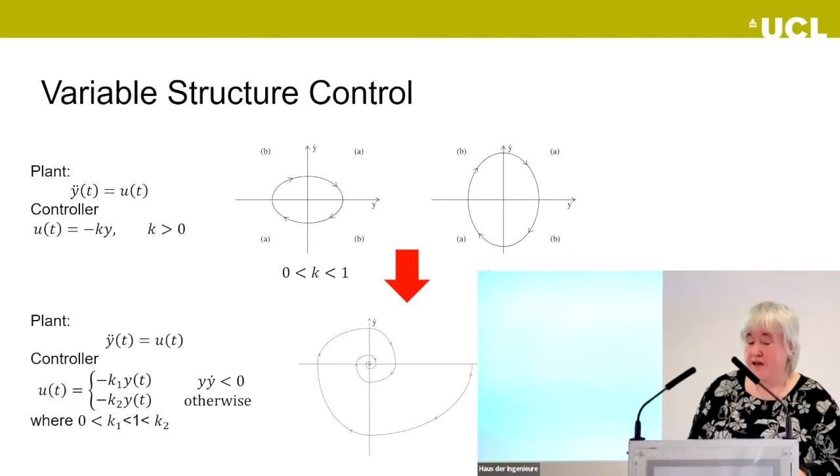However, if we take those two control laws, we have k in some quadrants that's less than 1, and k in subquadrants that's greater than 1, we can form a system which is asymptotically stable. So effectively, in those quadrants labeled B, we take my elongated fat ellipse and that trajectory, which moves us closer to the origin as we move around. The problem becomes if we stay on that trajectory, we then move further away from the origin, but not if we switch to the tall ellipse. If we switch to the tall ellipse at that point, then that continues to take us closer to the origin. So we get this very nice asymptotically stable behavior for the price of a switch.

So with variable structure control, what we have is a control law that we change according to some defined rules, which can, as we will see in some of the examples I talk about, be very, very different. And we have this nice potential to develop new properties which weren't inherent in any of the original subsystems, and they can appear.

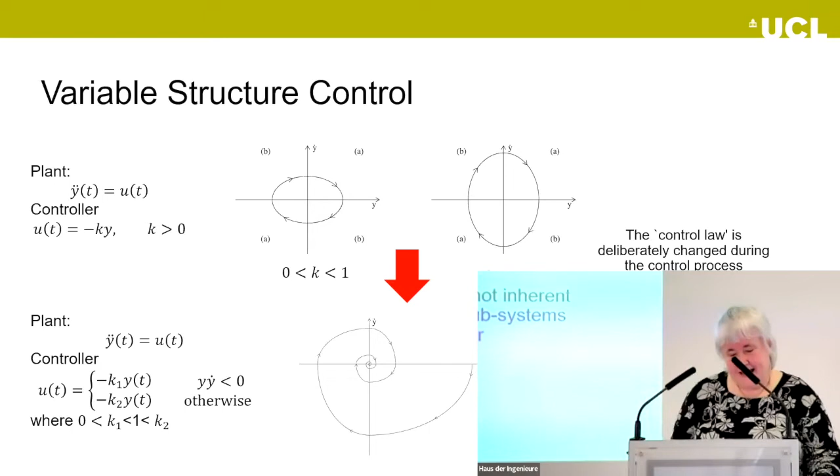But actually, variable structure control can give us a lot more than this. And I think this is the thing that has always excited me the most about variable structure control. When I talk to my students, I talk about the magic of discontinuous feedback control.

Let's think for a minute of the same double integrator we had before and consider that our nominal plant. Let's then say we have some sort of a perturbed plant, which in this case I'll take to be a scaled pendulum. So it's the nominal double integrator with some uncertainty that's written in red.

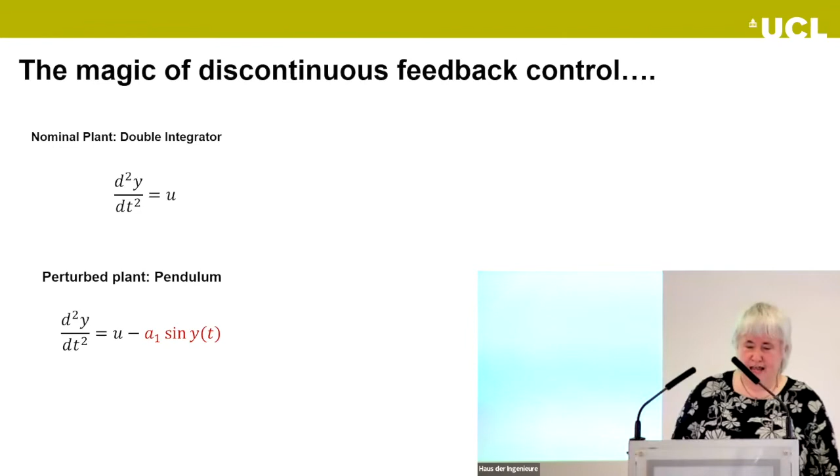If I design a very particular type of discontinuous feedback control, so I design a switching function, which we can think of very, very simply as the desired dynamics I want my system to have. So in this case, my switching function, when s equals 0, gives me a first order system with a pole at -1. I'm saying that that's the behavior I'd like my double integrator to have. Clearly, there is a very broad class of desirable behaviors I could pick, but this is what I've picked in this particular case. And I've chosen a controller which is just a switch.

If rho is sufficiently large in my switch, then both my nominal plant and my perturbed plant, their evolution can be seen on the phase portrait in the middle. And what we see is an initial transient that's different, and that's always going to be the case. So before I hit that line, which is effectively my line y dot plus y equals 0, I'm lying on my switching function. Before I hit that line, different things may happen to me.

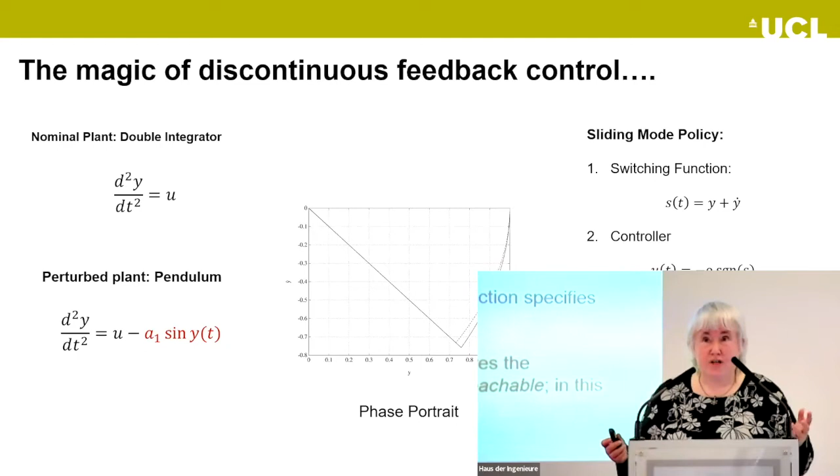So it's really important to understand why this happens, because this rather subtle difference between how we do control and what the control does is really what opens up the robustness. It gives us this whole potential to consider large-scale systems without knowing lots of information about them. It gives us lots of potential to find out what's happening with systems, for example, in terms of monitoring and failure detection. So what effectively happens when I apply that discontinuous controller?

Well, effectively what happens is I'm applying a signal which is switching around. In theory, it's switching with infinite frequency, which clearly, on the other hand, gives us other problems. But if we filter that signal, what we see effectively happens is that discontinuous signal, on average, is effectively reconstructing my sine term. So if we look at the filtered signal, which is the blue plot, we can see that it's pretty well following the uncertainty, the difference between that nominal model and the perturbed model.

So without knowing about it, this principle of the equivalent injection, this using discontinuity, gives us a means to find out a lot of additional information.

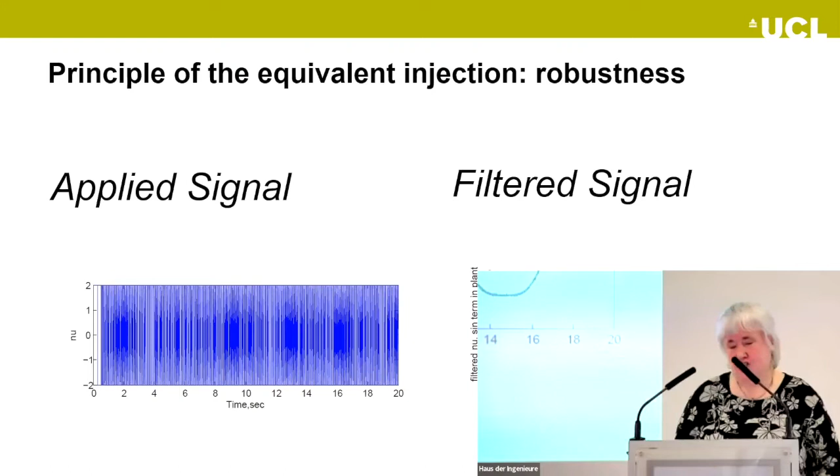One of the things that's interested me in very recent times has been this switch control paradigm and its relationship to nature. When I started my career, I was there with the power electronics people, I was there with the robotics people, I was there with engineering systems. But when we see this robustness, we think that, well, perhaps there must be more to it.

And a very good example of showing you how nature uses switch control is with something that's been incredibly topical in this coronavirus period, which is the immune system. Our immune system is a wonderful piece of engineering. For many of us, if we are subject to some kind of applied viral load, as we see on my figure, that's the kind of mountain, that's a virus load that's been applied to the system, then the immune system, a good healthy immune system, will respond to that viral load and bring us back to a healthy state.

And that plot on the right-hand side is actually experimental data. So it's showing the time evolution of the population dynamics of a specific type of cell following viral infection. And the first thing I think when we think about these control systems, because effectively it's a natural control system within the immune system, there is a feedback control. And I think it's interesting for us to learn from these ourselves.

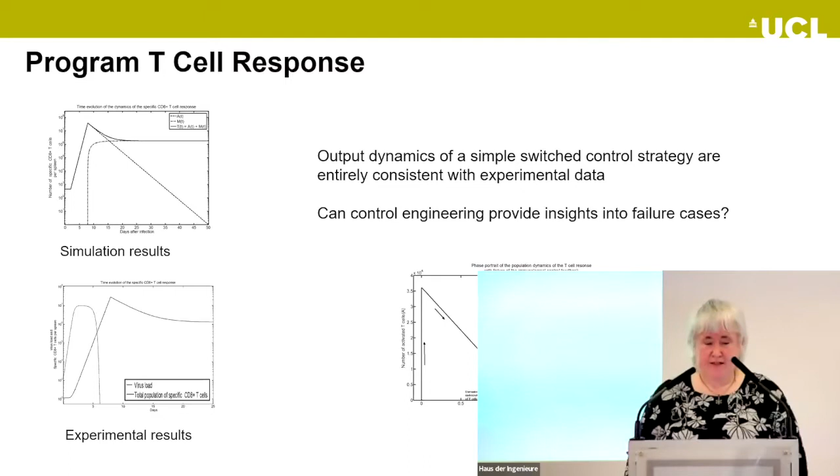And the answer is we can do things. I've worked in a number of areas with this kind of work. I'm just going to present one very briefly, which is one of the more recent ones, working with a clinician at UCL and a team of modelers in Australia, where we were trying to understand elite control of HIV.

Now, what's elite control? Clinically they refer to elite controllers. This relates to the quite small number of individuals who can contract HIV, but whose immune system suppresses it naturally. So they have a natural response within their immune system which suppresses the HIV loads to undetectable levels without treatment, whereas clearly the vast majority of individuals who contract HIV are going to have potentially a lifetime of antiretroviral therapy, for example.

So it's interesting to say, well, what really happens with these individuals who have this very special immune system that lets them control HIV themselves without antiretroviral therapy? Effectively what we need is a mathematical model, which we had - nothing whatsoever to do with me, that was from biological links to other teams.

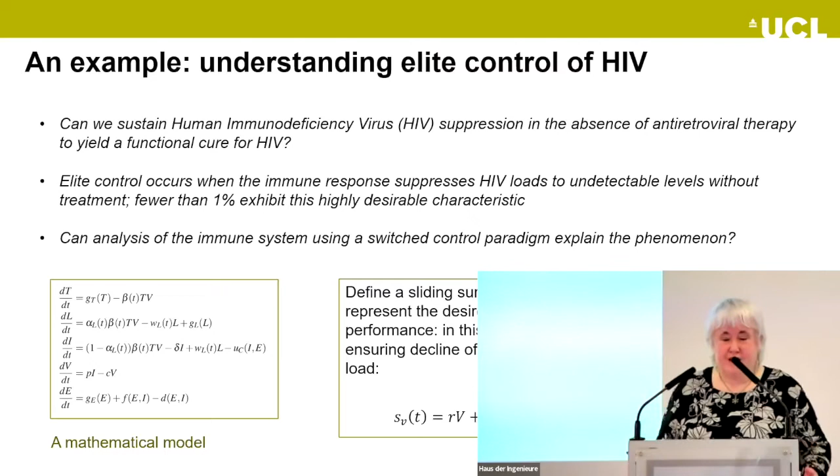So effectively, I've given one here. In this case, we just look at something very simple that says, first order, we want the viral loads to decay. And we use this notion of the sliding mode reachability condition together with consideration of parameter variations.

One thing you do find when you work with these models biologically is the range of parameter variations, whether it's a model for humans or for this, which was an experimental trial, an animal experimental trial - the parameter variations are quite vast. So they can be relatively coarsely defined, but certainly broad.

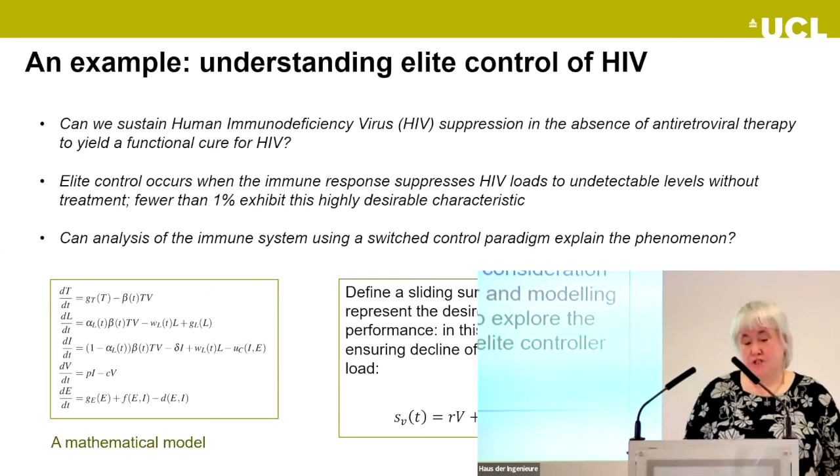So the problem for me and my collaborators was to explore effectively what these elite controllers were doing in this model of the elite control process. And we did a lot of testing via simulation and analysis, looking at the equivalent control, which lets us understand what is a highly nonlinear and time-varying control, and we can look at what the body is doing over time by this approach to understand how these immune systems are different.

And we've also used this kind of idea with certain drug treatments. Another example is psoriasis, which is a skin complaint, which can be very life-changing for those individuals that have it. There is a class of drug treatments for individuals who suffer with that complaint, which can be life-changing.

It can effectively eradicate the psoriasis symptoms - not like applying creams to minimize impacts, literally like my double integrator with the perturbation, it can eradicate the symptoms. But for other individuals, presenting with exactly the same history, exactly the same symptoms, given exactly the same drug treatment, the immune system doesn't respond well at all. So this is another example of how we can use these ideas to explore what's happening with either existing control systems that appear in the biology or a drug treatment, which is effectively, in my mind, an additional feedback loop.

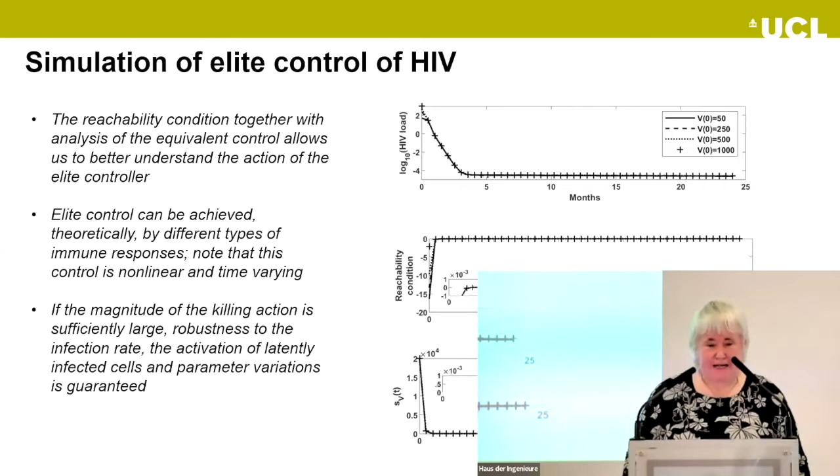I'm now going to move on to talk about some engineering work, and in this whole presentation, I'm not going to put together much mathematics at all, but I'll refer to one or two things because I know we may have some students listening for which mathematics was their thing. Certainly was always my thing - it's how I got into this in the first place, how we could use mathematics for good, how we could analyze problems and make a difference. Mathematics, and the mathematics underpinning control, particularly discontinuous control in my case, lets us do that.

So in this case, one of my big motivations has been scaling up. How can we manage complexity? When you look at energy problems these days, they might be involving consumers, they might be involving markets, they're still involving the core engineering there, but it's a much broader problem than it ever was.

There's definitely a need to consider communications, and as we'll see in this second part of my talk, I think data's good, but I was always kind of reticent when people thought the more data we have, the better we can do as control engineers, the better we can do as society. Personally, I think data needs to be managed. Some data can be good and very good, but some data can actually not be so necessary and give us problems.

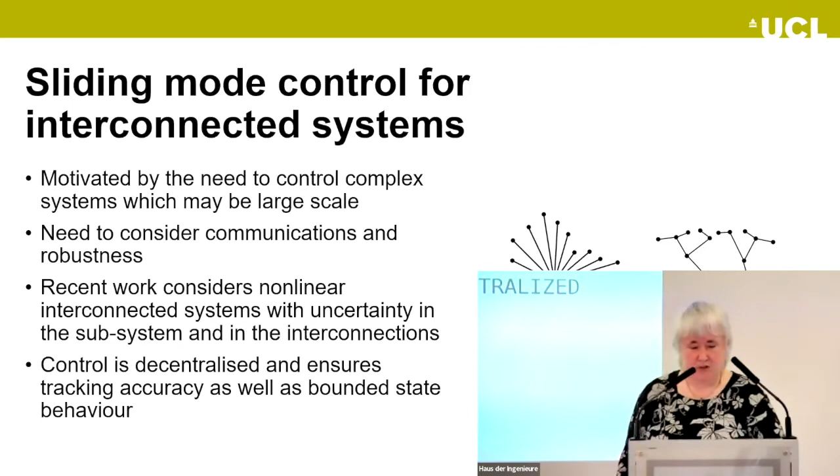So in this particular work that we did, we're looking at decentralized control. Very much pushed by my feelings that we don't want to know about everything - this isn't a good approach. But yes, a lot of the time we're interested in tracking something well, but also we're actually interested in the whole system too. We're not just interested in these outputs tracking well - we really want to make sure that the whole system is in a good space too. So we want bounded state behavior.

So here I've got a system description. I'm not going to talk much about the detail, but I'm going to highlight a couple of things. So we have an array of n subsystems, which are somehow interconnected. And as a control engineer, particularly as a discontinuous control engineer, I tend to think of my uncertainty in two broad lumps. So I think of uncertainty which is implicit in the input channel, which for me is never going to be a problem, because with an appropriate discontinuous control law, assuming I have sufficient gain, I can nullify that.

And then other lumps, which are not implicit in the input channel, and can be wider. In this particular case, they're representing unknown interconnection. So this is where I've got a system here which is nonlinear. It's got some uncertainty of its own, which I'm assuming is matched, so it's implicit in the input channel. And I'm saying, well, I can have a broader class of uncertainty, which is going to represent how these subsystems are impacted by the rest of the larger system.

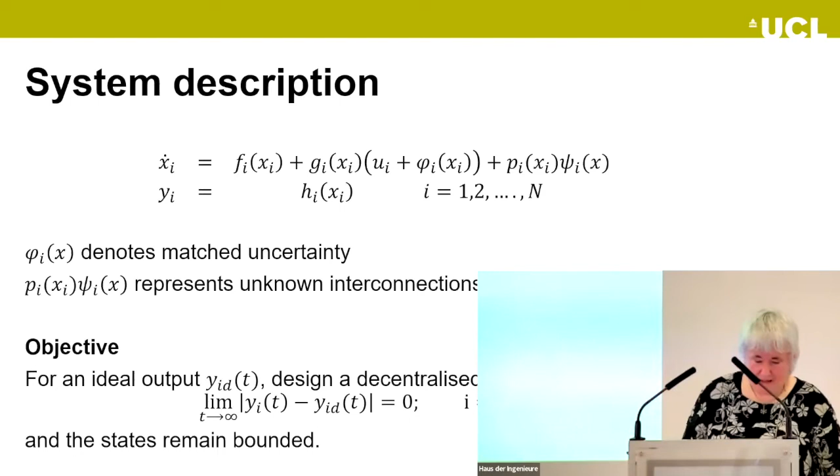And fundamentally, I'm wanting to take some sort of output and have a decentralized control, which will make the output of my system track this ideal output, and make sure that everything is bounded in this particular case. So I have to have some assumptions on this particular system, and as is frequently the case, I'm interested in channels - where the input acts, which is the first triple there. So GI, effectively where the input acts into my system. And then I've got the interconnections, which act through, if you like, a channel PI. So I effectively have two triples there that I'm interested in.

I'm always interested in how this channel where the control acts relates to the channel where the output is, and relates to the channel where my wider uncertainty comes in. I have some statements on uniform relative degree. I think probably the easiest way for some listening - I'm sure they won't want to go that far - but I didn't want to not put my assumption up and then get tricky questions afterwards.

The easiest way to unpick this is that if my uniform relative degree is equal to n, then I have a feedback linearizable system. So effectively here, this is looking at the distributions of those two function matrices, which represent where my input is and where my interactions are.

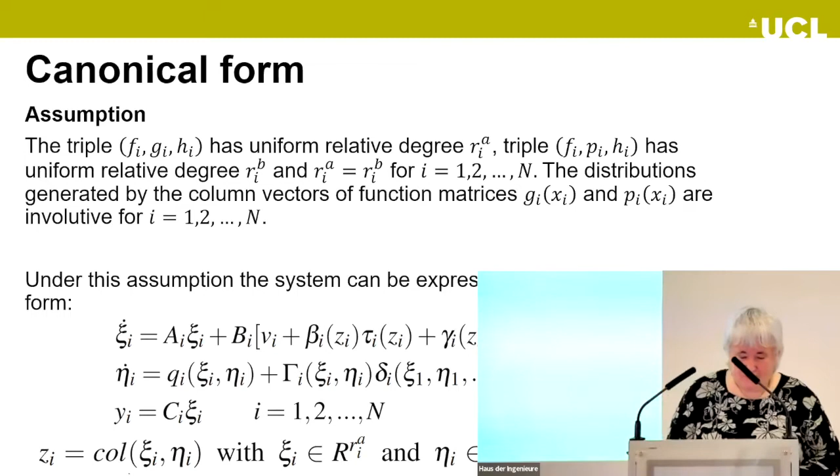It lets me write the system in a particular way. And the first thing you note with the first subsystem is that you see there I have a whole load of things coming into that first subsystem where I have a nice input, which I can nullify. So with an appropriate discontinuous control law VI, I'm going to be able to manage all of that relatively straightforwardly.

I have a second assumption, not too strict, that my output signals and their derivatives up to this order of my uniform relative degree are smooth, known and bounded.

And then I define a sliding function, which is very much the big brother, if you like, of the first order sliding function I used in my first example, where I had the double integrator and my dynamics which were just the first order system with the pole at -1. Here I have a system where I've chosen effectively a stable dynamics as my switching function.

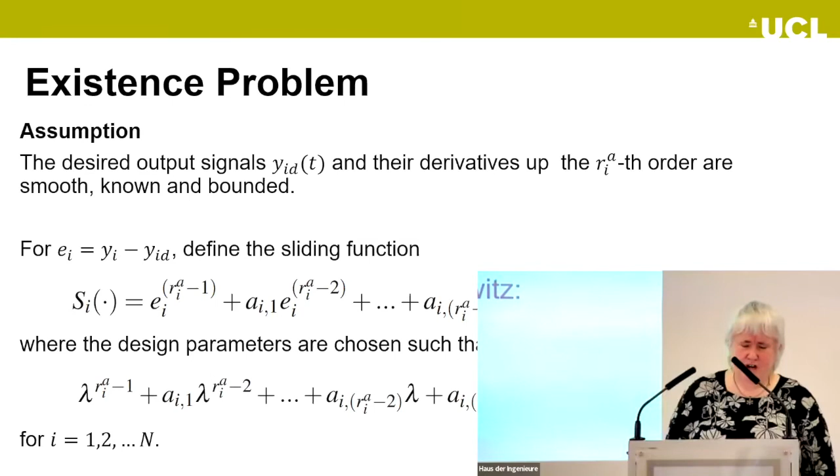And this I would quite often do. As we've seen, people involved in discontinuous control don't always have every subsystem that is stable. We've seen that even in ourselves, there are systems which aren't always stable within certain parts of their evolution. But as control engineers, and given this is a tracking error, we definitely want that tracking error to go to 0.

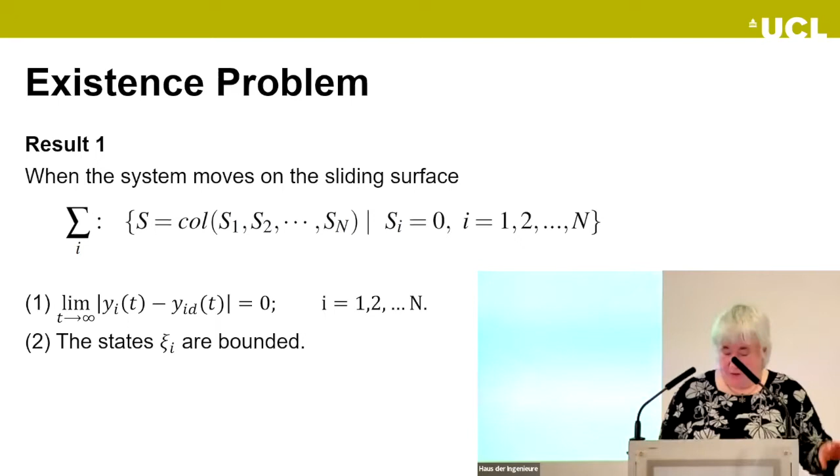So for that first problem, which is all about how I get the performance - called the existence problem - how I choose the switching function, why it's a good idea: in this particular case, when the system moves on that sliding surface for each of the subsystems, I can show quite easily that my output tracking errors go to 0, identically 0, and that my remainder states are bounded.

Perhaps what's more interesting is that this reachability problem, how I pick the control, is really quite simple. It's a big switch, actually, and some compensating effects. So I tailor the switch, being a control engineer that's designed a lot of controllers, to not use too much unnecessary control activity. And I have a bit of feed forward, and that's it. So a very simple controller, relatively.

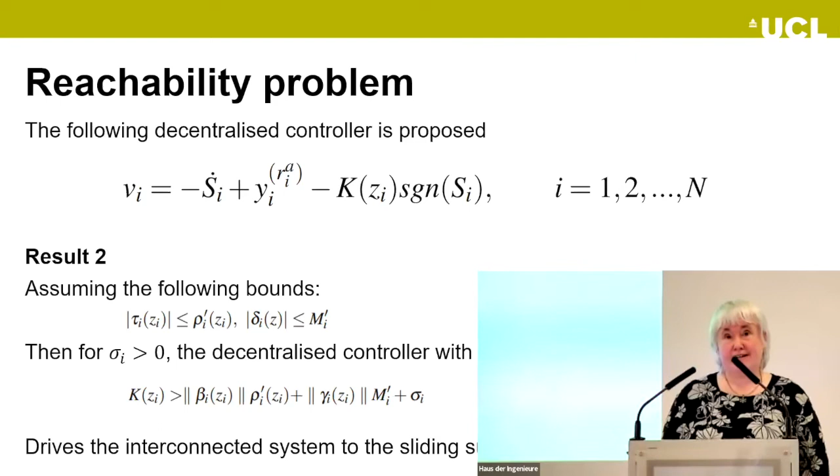And in this particular case, so long as my switch is big enough, if you like, my interconnected system goes to the sliding surface and I get my perfect tracking in finite time.

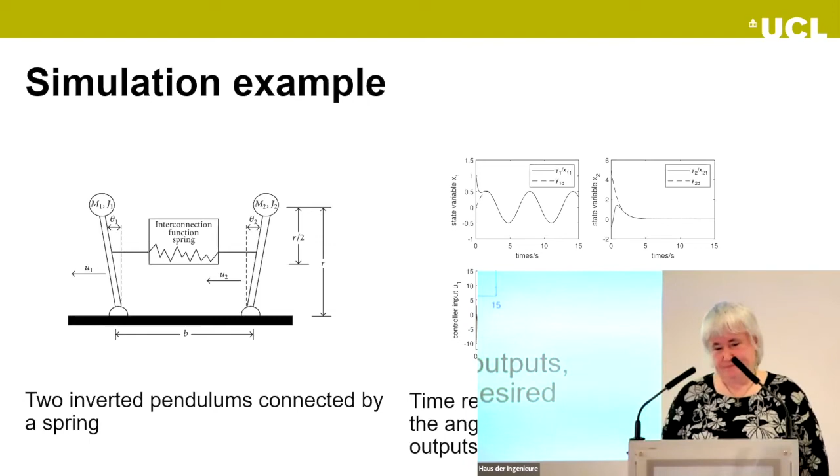Now, like all good control engineers, when this was published - and this is probably one of the big criticisms of quite a lot of our community - I did a very small example. I had two inverted pendulums connected by a spring, because it is a nonlinear system with nonlinear interconnections. You can see from the time responses of the system outputs that it very nicely tracks the reference. Further, all my states are nicely bounded.

Now I'm going to move on from my small problem and start thinking about bigger problems, and think about this increasingly data-focused world of ours. This is very much a personal view - so this is what Sarah Spurgeon thinks at this moment in time.

So for a lot of us who've worked in the control community, we've worked with physical models. We've done a lot on model-based control. We know that models may be very time-consuming to find, and they can be expensive to find. For some, we have them - you look at the aircraft industry, for example, they have wonderful models that they've developed over many years.

Those of us that have seen the automotive industry very much catch up with the aerospace industry. So some areas we have lots of stuff we know about really well, but we perhaps don't have the models of everything. We have some which is validated, which is established, and that probably we don't want to just throw away. We've got a lot of knowledge there, we know what we're doing. But is a world which just thinks about physical models so scalable?

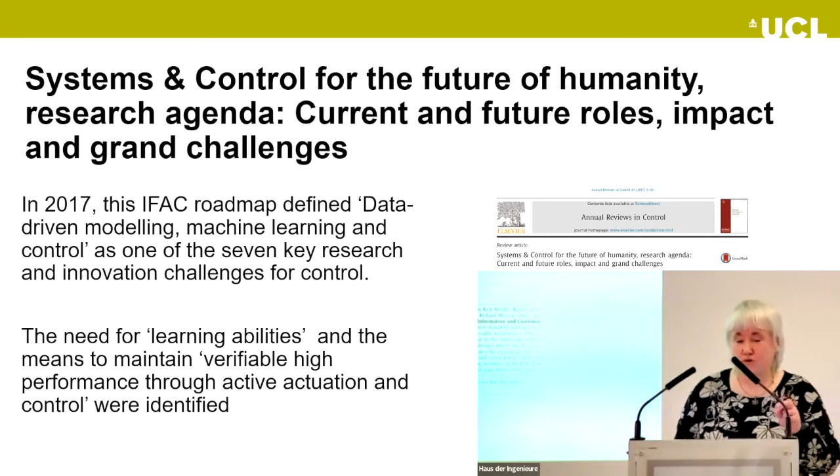And this roadmap defined for us data-driven modelling, machine learning and control as one of the seven key research and innovation challenges for control. It talked about the need for learning abilities and the means to maintain verifiable high performance through active actuation and control. These are really important goals, and I think they're really important goals for us to crack.

Now, as someone who's interested in discontinuous control, I started to have a look at the intersection between discontinuous control and some of these data-driven approaches. Within my own community, there's a common starting point in some of the contributions, which basically says we think of a nonlinear system as being one where the output can be generated by looking at some relationship between a series of inputs and a series of previous outputs of that particular system. We don't know the function, we don't know the size of any of the vectors, but we can broadly think that if we know about the inputs and outputs, then it's perhaps not too strict a step to say that this may be a good starting point.

And then we can take some conditions, which again are not too strict, whereby we can look at how the output at the point we're interested in can be given by the output at a preceding point, and some function which is changing, it's bounded, but is multiplying the inputs. And we can look at how we can estimate that function by minimizing an appropriate cost function. So being able to do this data-driven modeling in this very particular way has been a starting point.

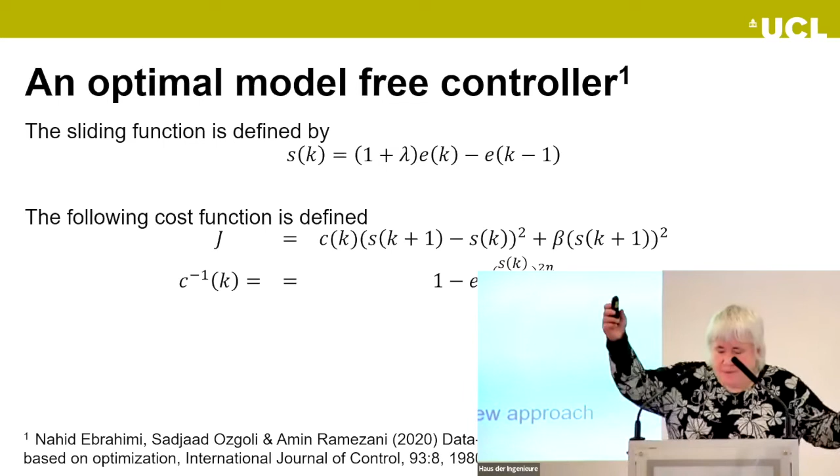And then when we're close to the S where we want to be, we actually tone down the control, so we don't do things that are too aggressive, and this doesn't give us problems with large discontinuity in the control. So although it looks heavy, that's effectively what it's doing. It's tuning things so that we have this very big control action that forces us towards S, allowing larger activity, but then tunes it down and becomes a much more appropriate control action as S becomes smaller.

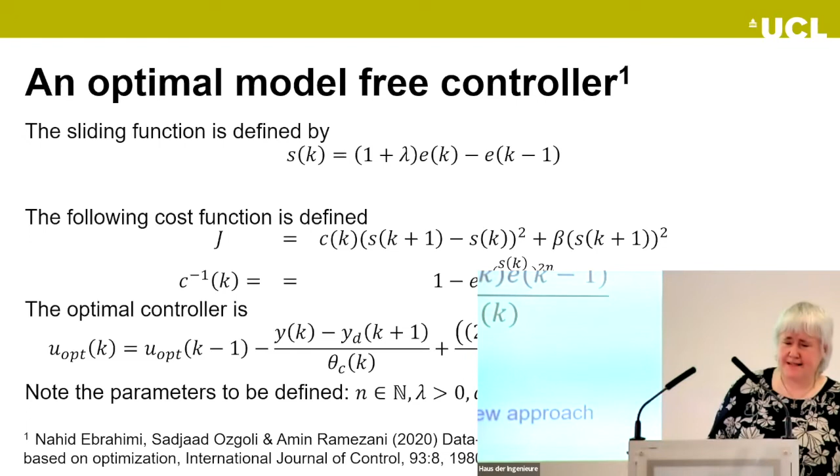And you can find an optimal controller. One of the things you note straight away, and certainly when you try to do this, is that there are quite a lot of parameters that you need to define, and it's not intuitive at this moment in time, at least to me, how you'd select all these parameters and what they're actually doing for you. For some it's okay, but for others it's less obvious.

So what they did in this paper was they tried to do exactly what I've done in a lot of my work. They effectively tried to imply, within this data-driven learning, model-free approach, a reachability condition, trying to impose some of the ideas of variable structure and sliding mode control into this framework.

They did a couple of things. One, they made some assumptions on the disturbance which allow them to bound it quite nicely and also estimate that disturbance. That's something that, going back a very long time, a very well-cited paper in sliding mode and variable structure control used that kind of disturbance estimation. So they're using something from history in this data-driven modeling field.

And then they used a control law which again looks a bit heavy, but if you look at the detail, the first elements in the control law are really just the optimal control law, removing the impact of the disturbance, keeping that nominal control there, and then putting a switch in. In terms of the size of that switch, that's the phenomena I was talking about earlier, in terms of how we tailor the size of the discontinuity depending on where we are in our evolution, whether we're far from the sliding surface and want to get there quickly, or we're there and want something a little more nuanced.

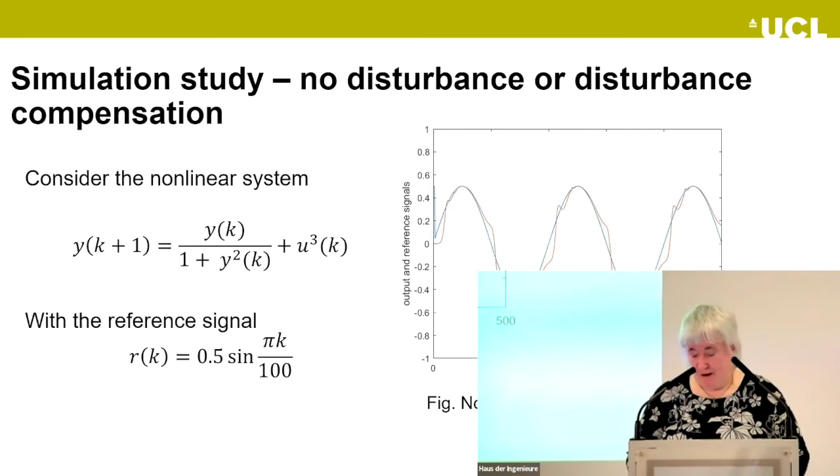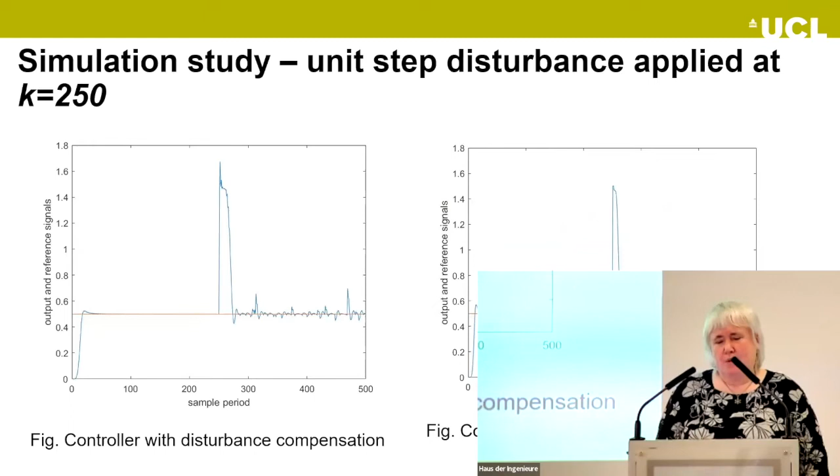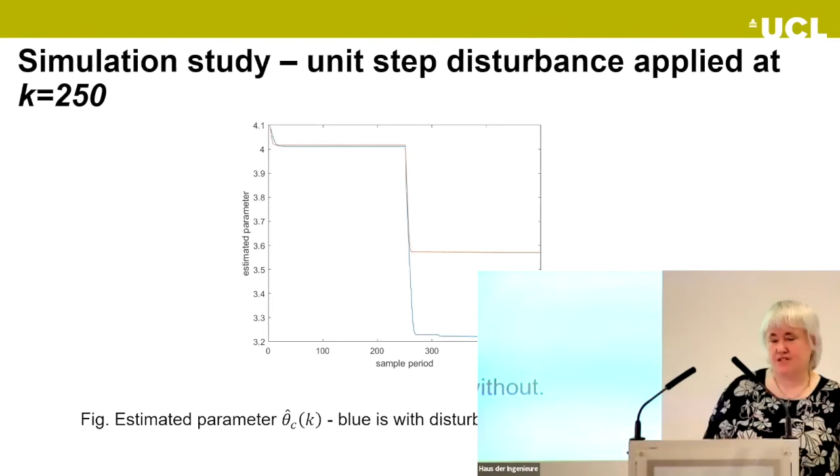So I continue to dabble with some of these ideas about data-driven methods. In my conclusions I've got no results for this, but it's a PhD student I have the pleasure to co-supervise, Keshav Iyengar, who I work with, along with a colleague, Dan Stoyanov, who leads our Center for Interventional and Surgical Sciences at UCL. They're interested in all kinds of primarily robotic systems that can be used clinically.

This concentric tube robot is quite an interesting one. It's used for minimally invasive surgery. It's very dexterous, compliant, made of super elastic type materials. The tube interactions are extremely challenging.

It is a system where people have tried the classical robotics approach. And it does look, in this particular case, as if the classical robotics modeling yields some good things, but is far from perfect.

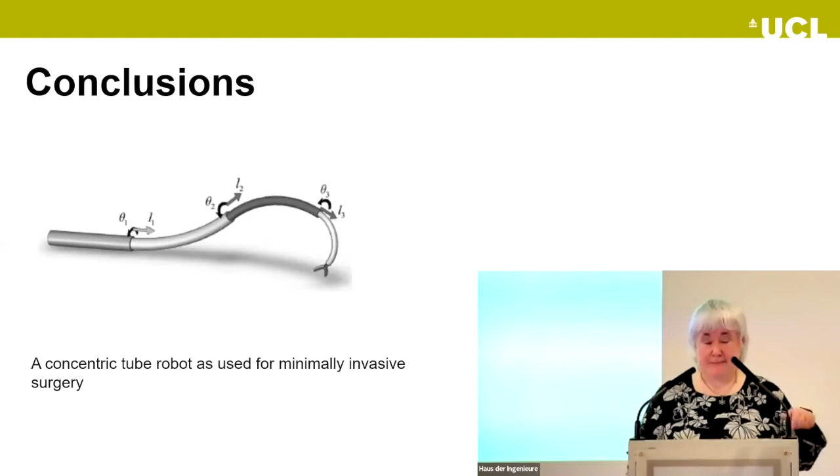It certainly has potential, and it is one where, despite all the work that's gone into control and robotics, it looks like classical approaches to robotics for this particular system are challenging to progress to anything like the accuracy that would be necessary to contemplate trying this as, for example, a steerable needle for a human being.

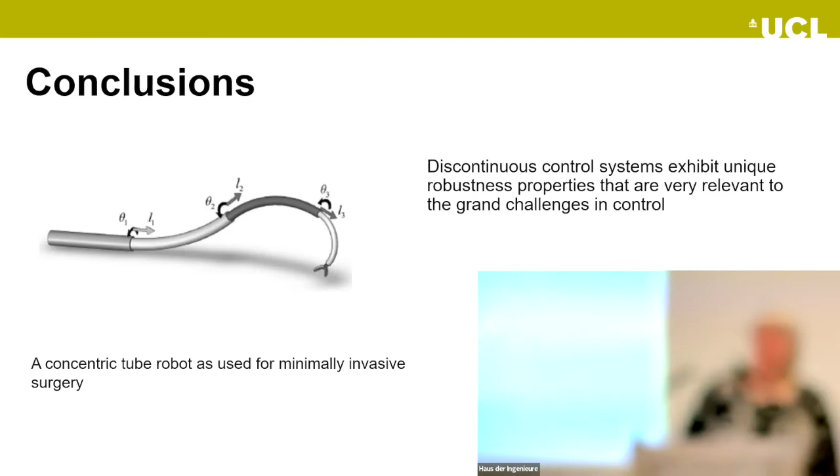So what I'm going to do now is my final conclusions. As I said at the start, discontinuous control systems for me are just as exciting as they were when I was 21 years of age, a long time ago now, and I first saw those early papers on variable structure and sliding mode control. I think the robustness properties they exhibit are extremely relevant to the grand challenges in control.

I think we see in the biology more motivation. To me, there is so much we have to learn from the control systems inherent in nature, and in turn we can give back by helping clinical academics understand drug treatments as a control engineer. I've spent some time in recent years with clinicians, more than I have previously, and finding a common language sometimes takes time.

But the ultimate conclusion of most clinicians, when you talk to them about drug treatments, is they're highly conservative, high-gain controls. They are nowhere near the particular drug treatment that an individual would need. They are chosen to cover a broad church of individuals around the world. So they are high-gain controllers, typically more than we need to do this.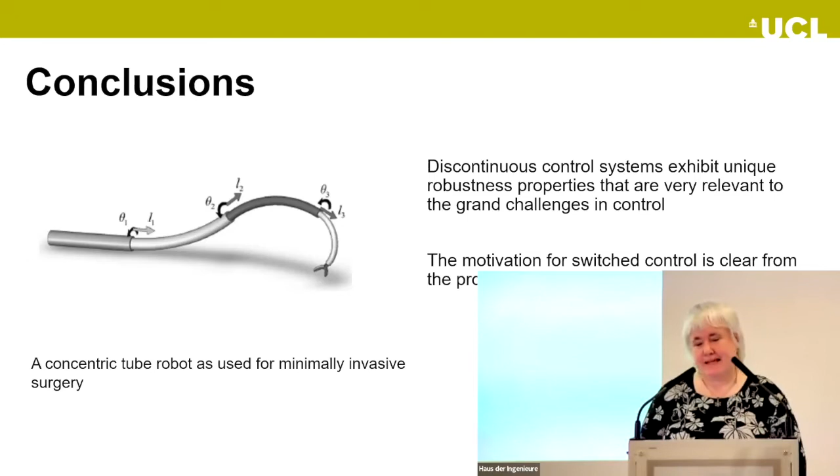So there is clearly stuff we can give back toward moving towards personalized medicine. I also think there's more we can do to use the robustness of the paradigm in data-driven and learning systems.

It must be said that at the moment, Keshav, with the concentric tube robot, is using a range of policies and is showing that the learning policies he uses in his deep reinforcement learning make a big difference, as we as control engineers would expect. We're not using discontinuity yet, but I think there is certainly work we can do in that area.